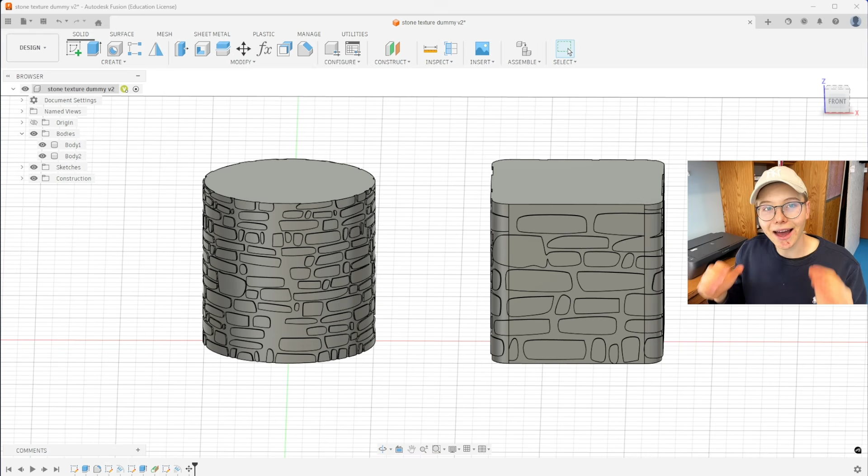After watching this video, you will know exactly how to texture your 3D prints with a stone wall texture. I'm going to show it for a flat surface and then even for a cylindrical one that is a bit more complex, but I believe you can make it. I have my printers running, so if there's any additional noise, I'm sorry, but I hope it won't make that much of a disturbance.

As you can see, I have already both of the designs ready in Fusion 360, so I'm going to be showing you how to do this quite quickly, and I'm going to be starting a completely new design so that you can go with me during the designing process.

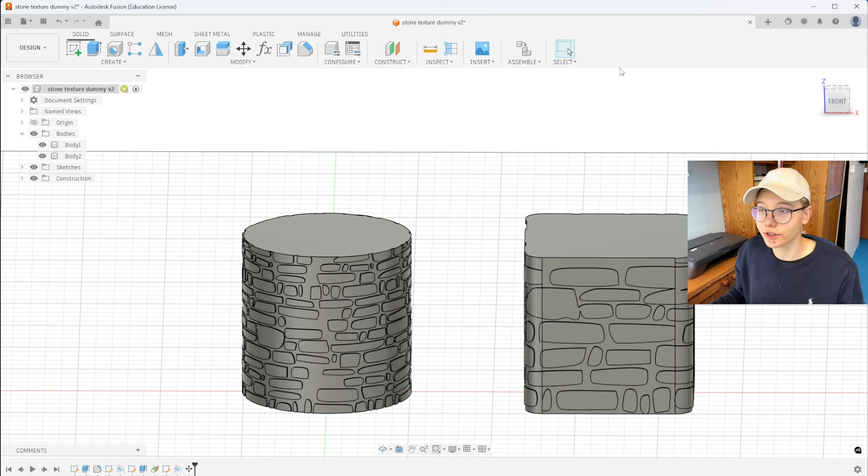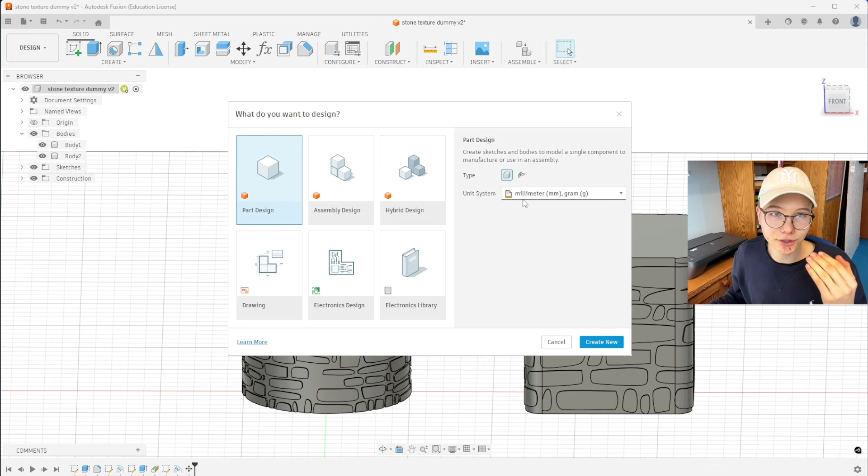So we're going to start a new design by clicking Ctrl N, or just clicking on this plus sign new design over here. Once we have that, we can select part design, because we're not going to be making any complicated assemblies. Once you click on part design, you can click on create new. I'm going to be doing it in millimeters. If you are from America, you can do it in inches. It doesn't really matter, just adjust for your own values. So click on create new.

Once you have that, first of all we should save it, of course. So we're gonna save the part so that we actually know where it's at. Once you have it saved, you can always be sure that the file doesn't just disappear.

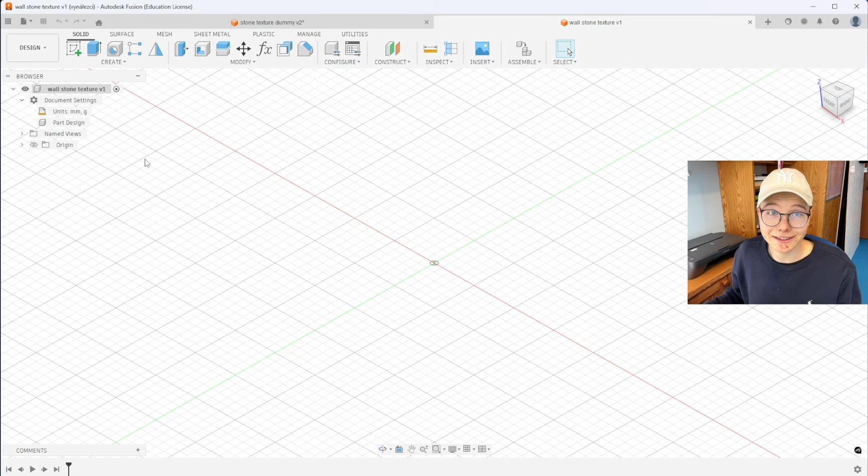Now we're gonna be starting with the flat texture. I'm gonna show you how to create it on just a very flat 2D thing so that you can apply it, for example, for your walls if you want to 3D print one with a texture.

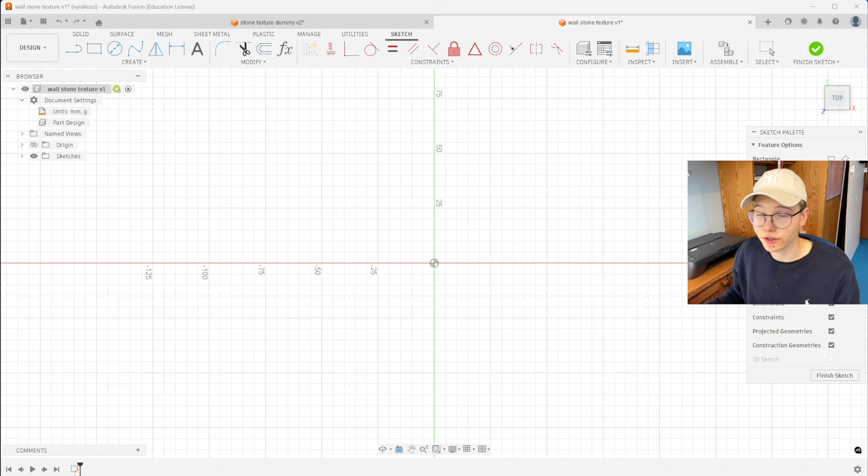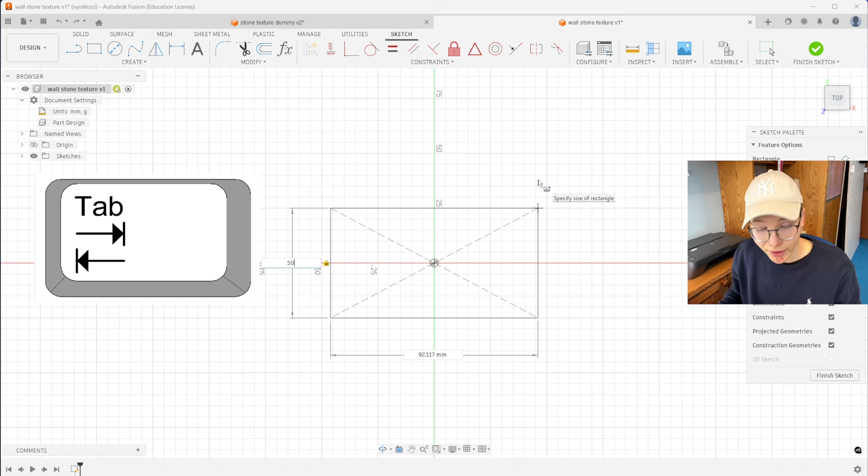So go into create sketch. In create sketch, select whatever plane you have. I'm going to create just a very simple square so that I can show you how to apply the texture. So I'm going to click on R to create a rectangle and select the center rectangle from the right menu. Once you click on the origin, you can stretch it out and input the values in there. A very good feature in Fusion 360 is that you can input the value. For example, I wanted 50 millimeters on one side, then click tab, and it will switch automatically to the second side, which can speed up your designing process quite amazingly. Once you have that, you just hit enter and it appears.

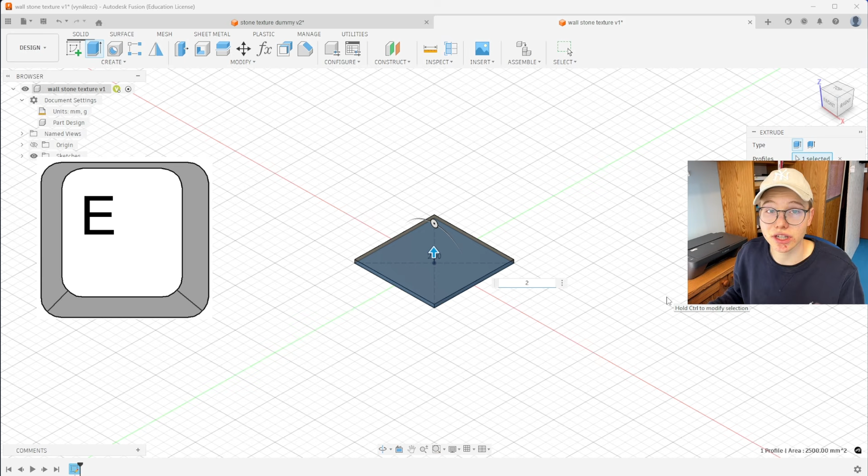That's all that I'm going to be needing from this sketch right over here. So I can go to finish sketch, extrude it by clicking on E and selecting, for example, 2 millimeters, just to show you how you can apply this texture on your own. Once I click OK, I have created this object that I'm going to be applying the texture to.

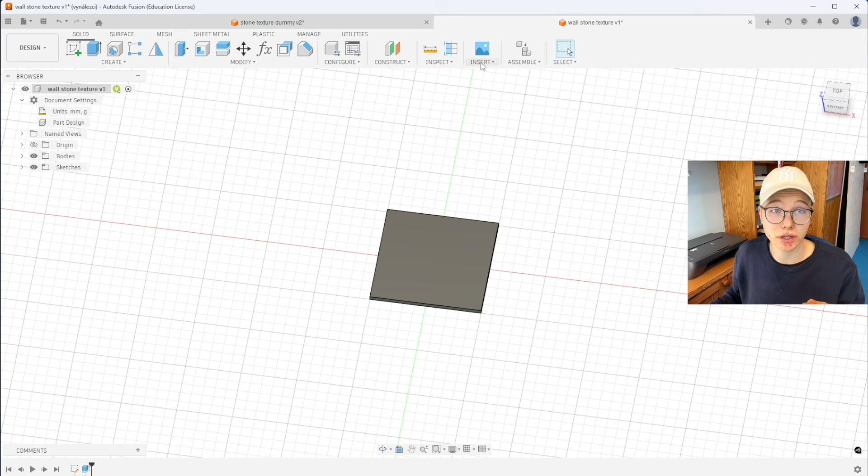The texture is in the format of an SVG, which is basically something you can take and use in Fusion to put something into 3D space. It's not just a basic image. It has special definition so that Fusion can actually convert it into a 3D object. So that's what an SVG is.

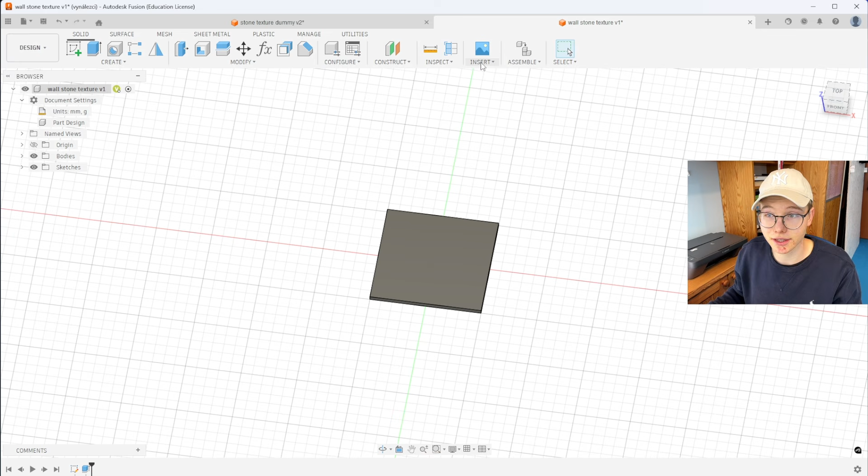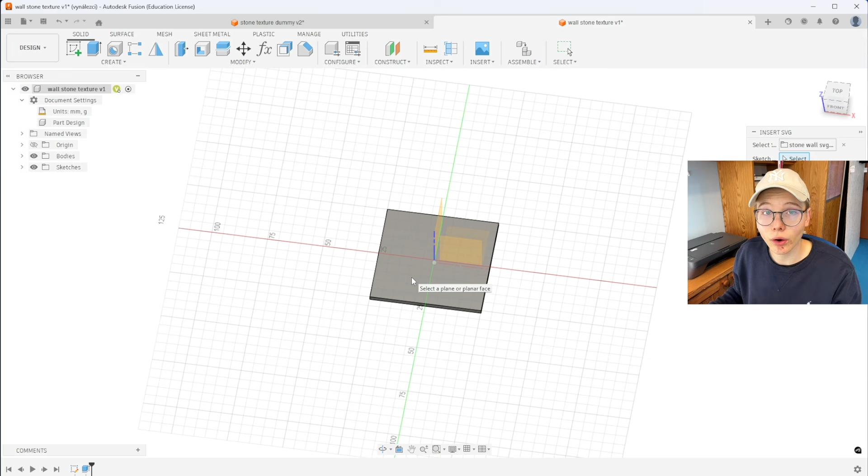Once you have the SVG downloaded, you're gonna go into Insert and insert an SVG, which is right over here. Once you click on that, it will allow you to insert something from your computer. It's gonna be named Stonewall SVG. Once you click that, it will ask you to select a plane or a face on which you want to place this texture. So I'm going to be selecting this face because that's the flat surface that I want to apply the texture to.

Once you select it, it will import this stone wall texture into the design. Now you can position this and size it however you want by adjusting these arrows that you have right over here. You can even place it on an angle. So if you want an angle, you're gonna move with this, but I do not want an angle, so I'm not gonna be applying it.

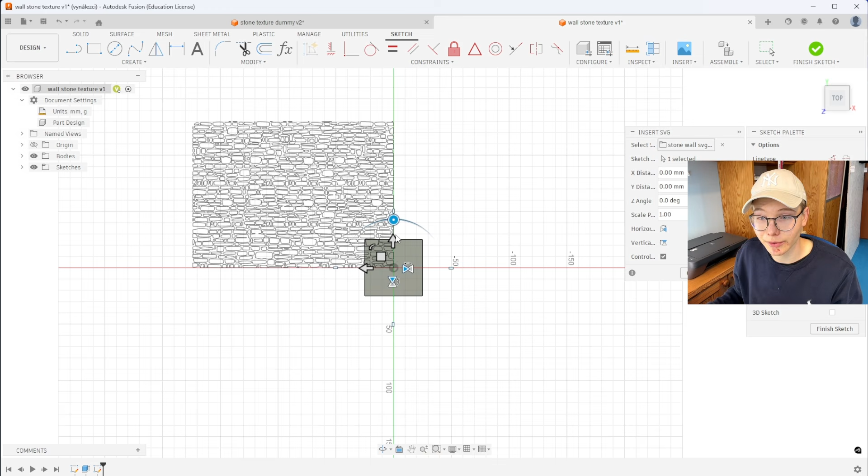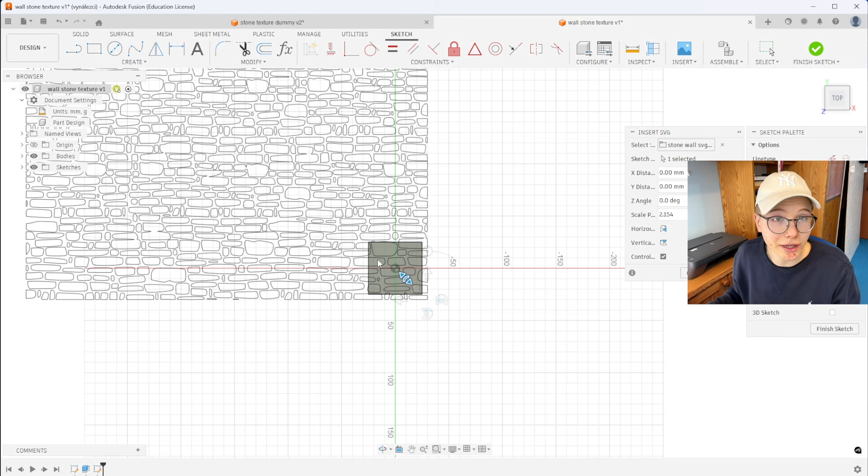If you want to move it and have it somewhere else, you're just gonna drag these arrows right over here. And if you want the stones a bit bigger because you want a different texture, you're gonna be dragging this small arc that is over here, and by stretching it out you make it bigger, and by pulling it toward yourself you make it smaller. But I would recommend, if you are making this for 3D printing, rather making it bigger so that the printer doesn't have that much trouble actually making the texture, rather than smaller.

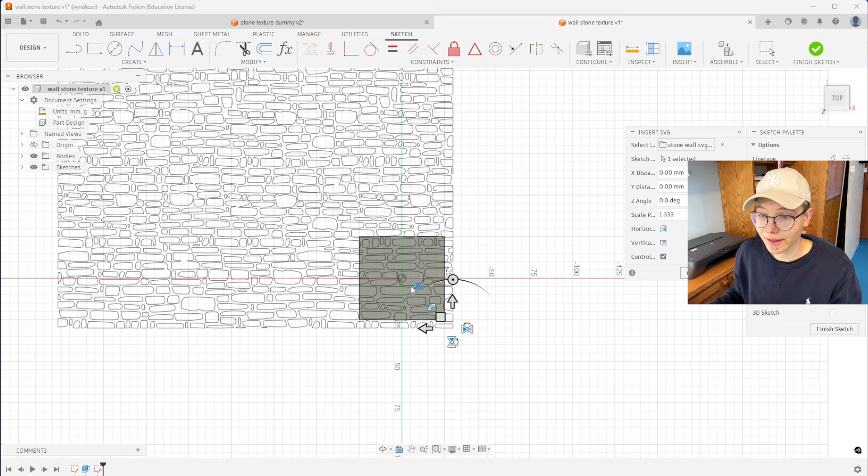So once you pick your size, for example, let's say I would like to have it just like this, you can click on OK. Now Fusion might take a bit of a while to load because the texture is a bit more complex shape for the software to accept, but it should be able to do it if you have a decent computer. I don't really have a good computer and it is still able to do it, so you should be able to do it definitely as well.

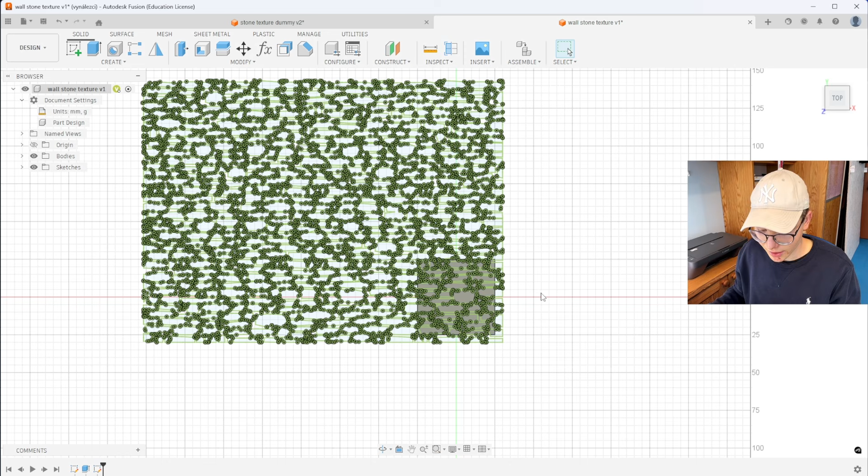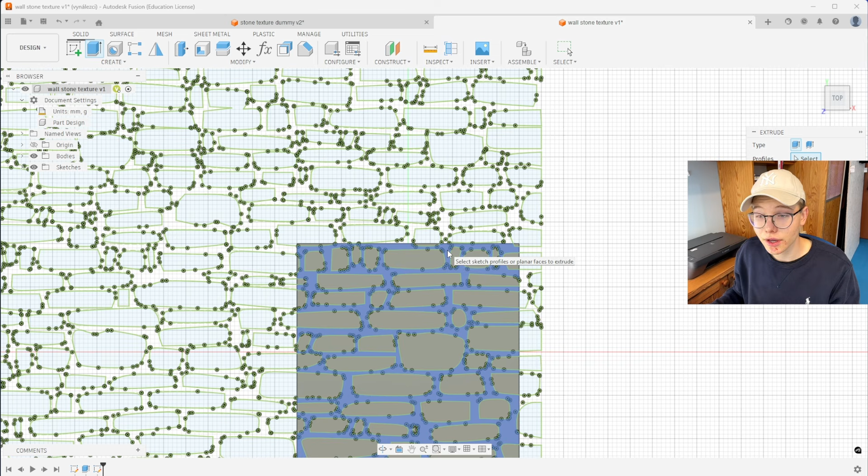Once you have that, that's all we need from this sketch. Finish the sketch, then click on E for extrude, and select either the stones you want, or the spaces between the stones. For easier use, and to avoid selecting all the stones individually, click on the spaces between the stones, and instead of pushing the stones up, push the spaces down, so we're using a negative value.

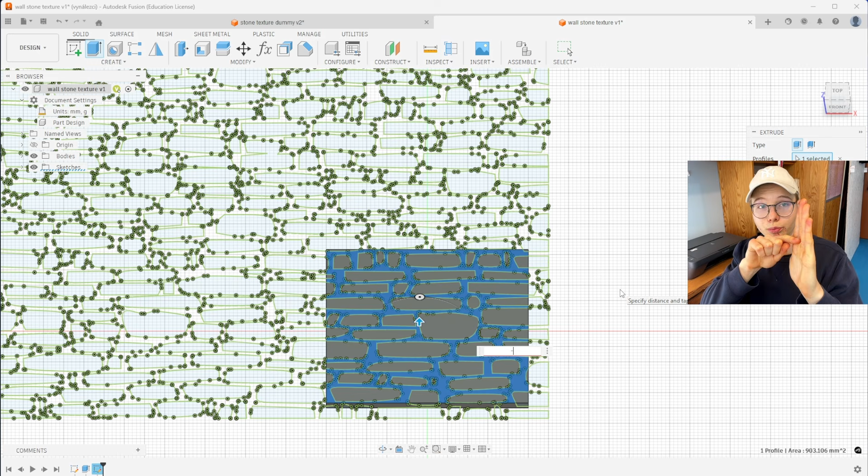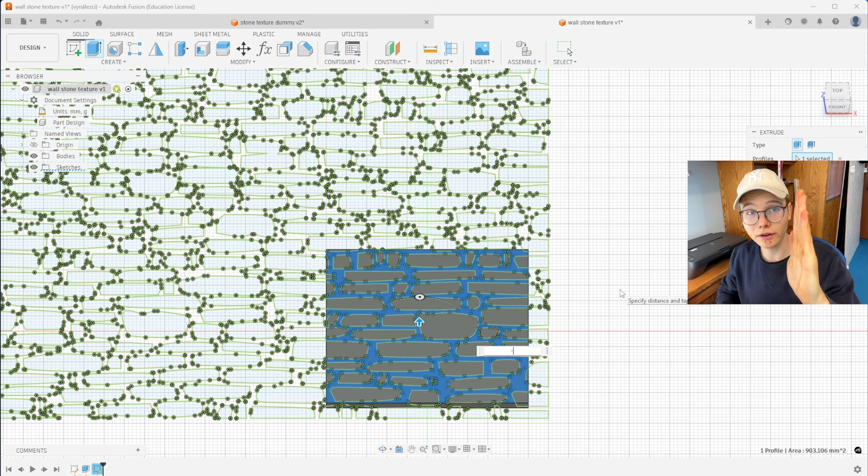Because we're going to be 3D printing this, if somebody wants it vertical and you put this value too high, it will create overhangs that aren't printable. I recommend not going over 0.4 to 0.8 millimeters, but you can adjust this on your own. If printing flat, it doesn't matter, you can use any size, but for vertical or angled printing, stick to 0.4 maximum.

I'm going to use 0.4 so I can show you. As you can see, the operation was automatically selected to cut, so it will cut into the stone. Once you hit OK, you now have this very simple but beautiful texture applied to your surface. That's how simple it is to put it onto a flat surface.

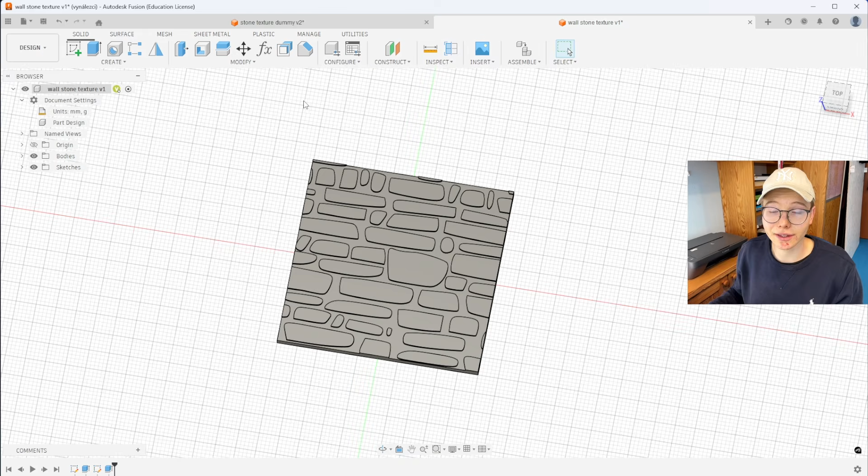Now I'm going to show you how to put it onto a cylinder, which is a bit more complicated, but many of you can make something like a tower from it, which even I use in my designs, and it looks really amazing, so I think you'd like to see this.

First, we're going to hide this body by going into bodies, selecting the arrow, and clicking on the eye so the body disappears. Now we're going to make the cylinder.

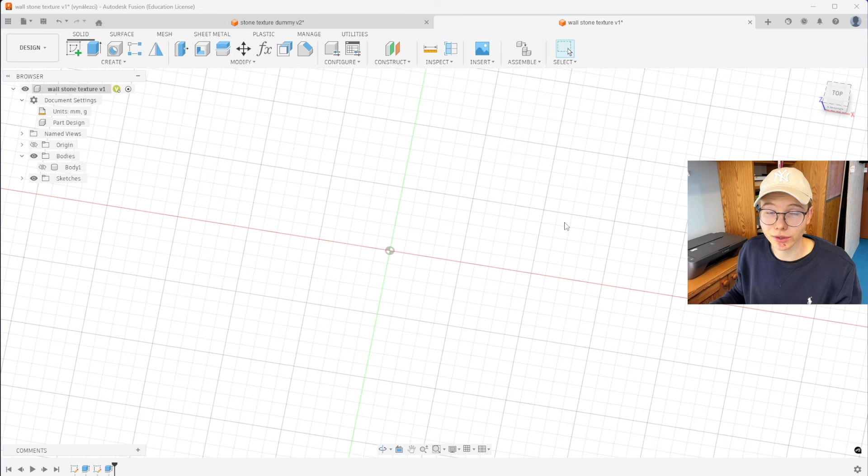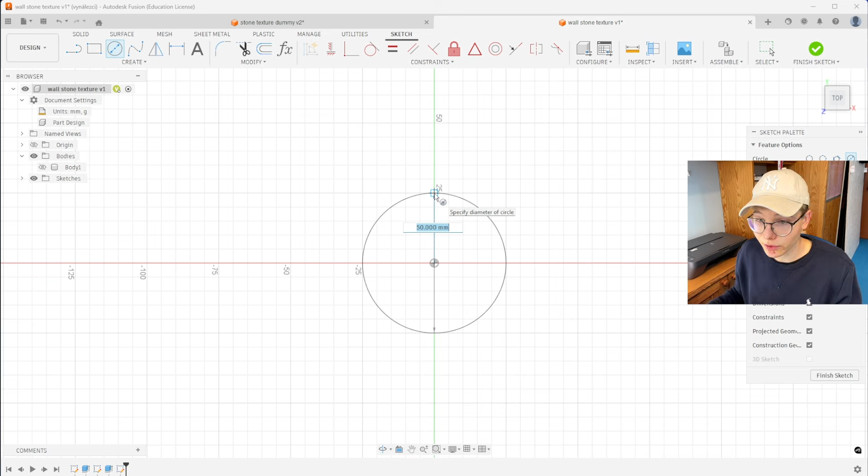To make a cylinder, create a new sketch on this plane. Create a circle by hitting C, or use the menu, but it's good to know shortcuts since it speeds up the design process a lot. Now pick the diameter. It's really important to remember this diameter because we'll use it later, since there's an additional complication that we don't have with a flat surface.

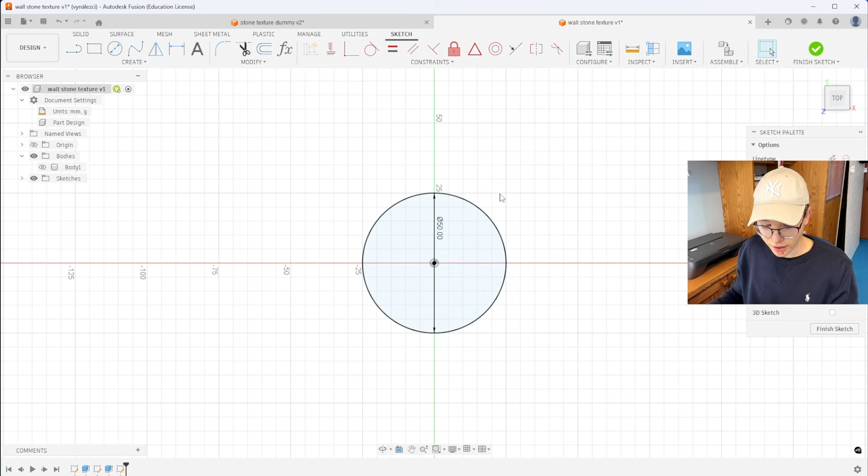I'm going to stick with, for example, 50 millimeters. If you use inches, it's going to be a bit different. Once you have that, that's everything we need to create the cylinder.

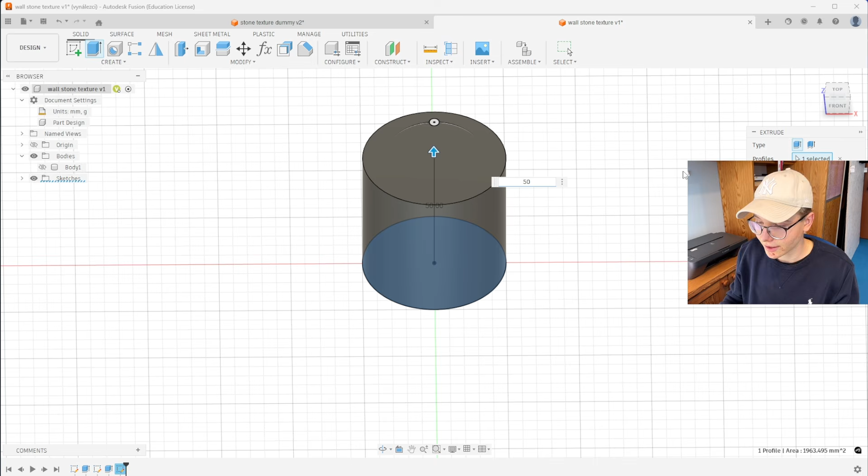Now you're going to extrude this again. Either hit extrude in the menu, or click E for the shortcut, and extrude it to whatever size you want. I'm going to stick with 50 millimeters, or whatever inch value you had. Once done, click OK or hit enter to speed up the process. Now you have this very simple cylinder.

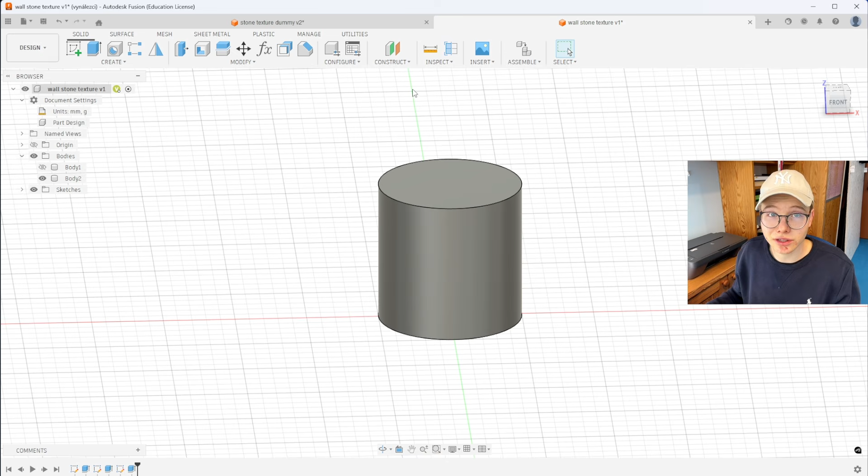Now we're going to import or insert the SVG texture again, but we need to do it a bit differently. First, we're going to construct a plane to make it on. To create the tangent plane we need, go into Construct, and select Tangent Plane. This will create a plane that is tangent to the cylinder in front of you in the design.

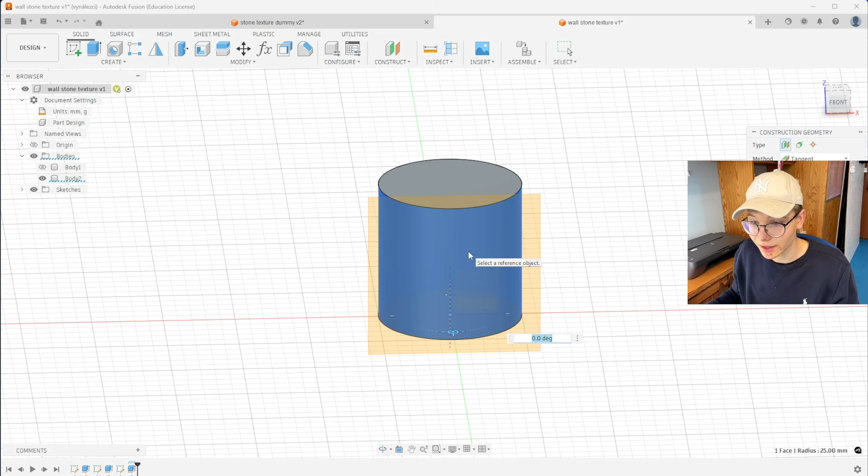You're going to create the tangent plane and select the face of the cylinder you want this to apply to. Once you hit it, it will pick the plane that is facing you, so Fusion really makes it simple. Once you have that, click OK.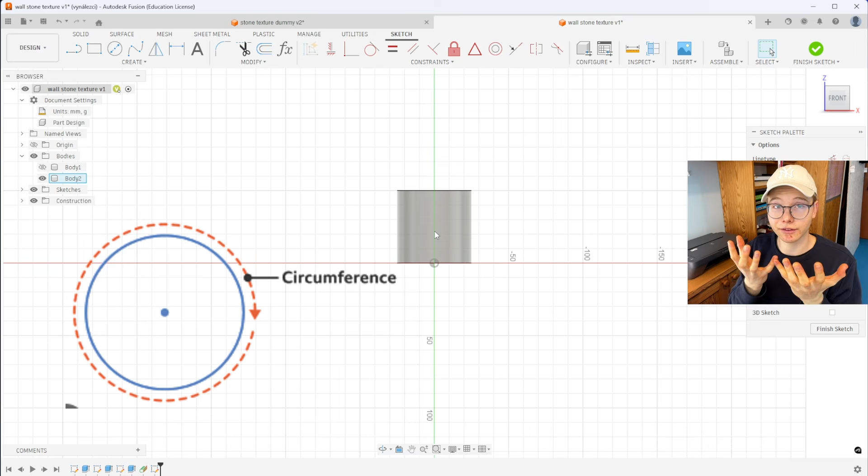Go into sketch and create a sketch on the plane we just created. Now we need to know the circumference of the cylinder so we can put the texture only on the circumference without it going beyond or intersecting. To do this, Fusion has an amazing feature we're going to use. Click on Line from the menu, or L for the shortcut, which again speeds up your process.

Click on line, select and go from the origin, and drag it out, making sure there's 0 degrees so that it's actually horizontal to the origin that we want.

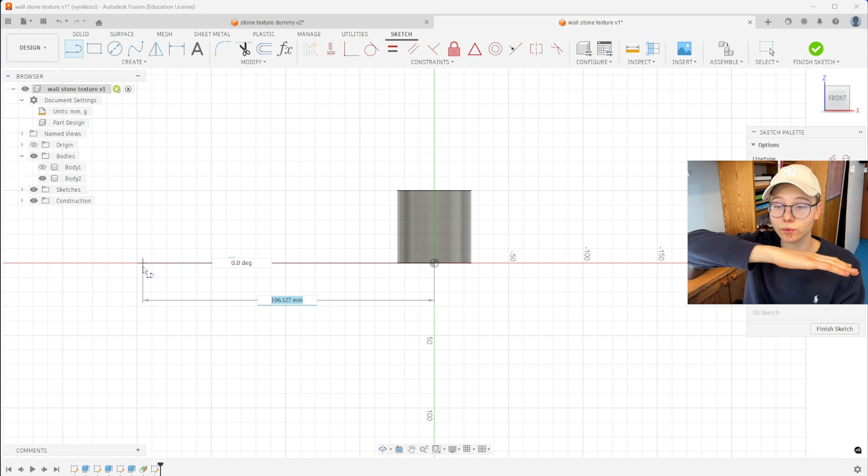Now you're going to import the diameter you chose, because the formula for calculating circumference is diameter times pi. Fusion allows us to use pi without having to estimate the value ourselves. So first import the diameter you have—I have 50 millimeters, though you can use whatever units, inches or centimeters. So I'm putting in 50.

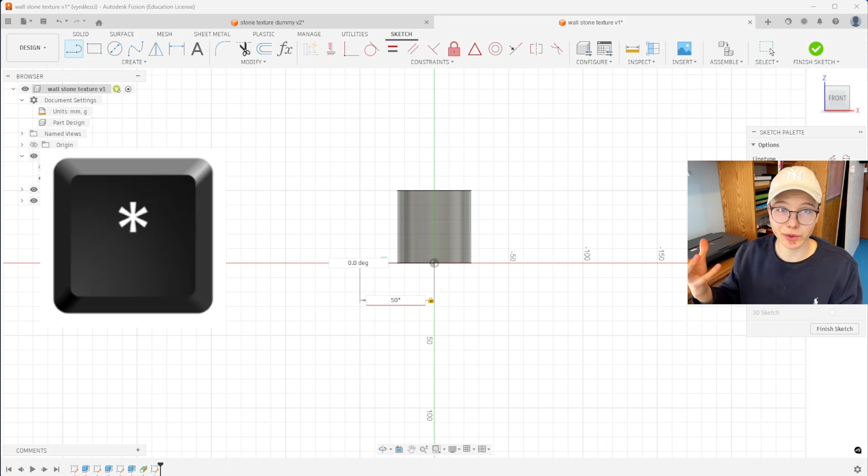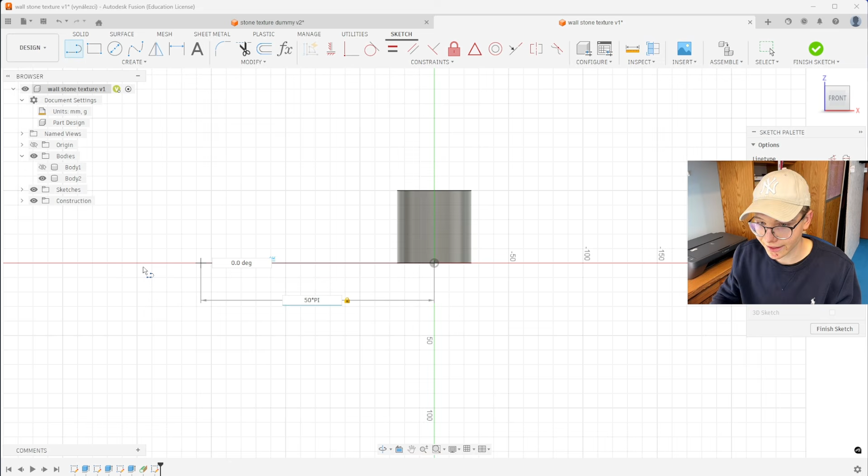Now to use pi, hit the multiply button—put the star that represents multiplying in Fusion—and then import pi. Fusion allows you to import pi by typing capital P-I, and this creates pi for you in the formula for the length of the line. Once you have that, just hit enter and it calculates. As you can see, I inputted 50 millimeters and it's about 157, which is basically 50 times 3 point something—so you can see pi was estimated correctly.

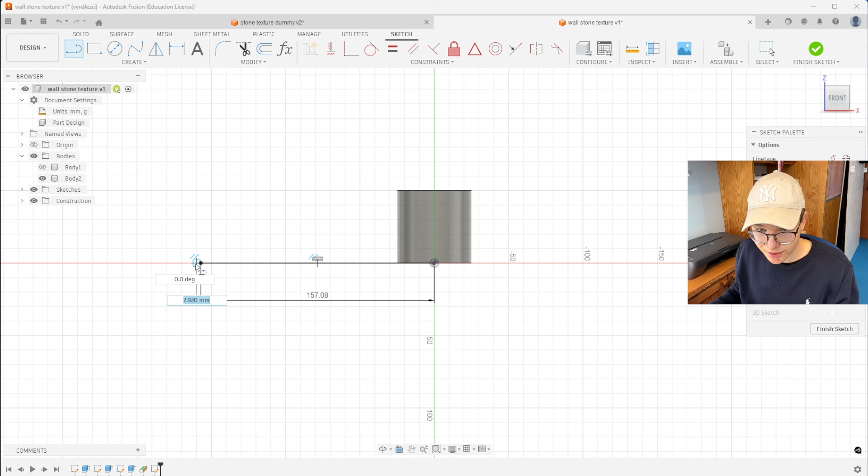Now we're creating another line going from this point at the end of the line upward, because this creates the limiting line where we can actually place the SVG. Once you have that, hit insert again and insert the SVG that we already inserted before on the flat surface.

Now the really important part is using the scale arrow to scale the sketch so that it doesn't go over the line, but goes just very close to it.

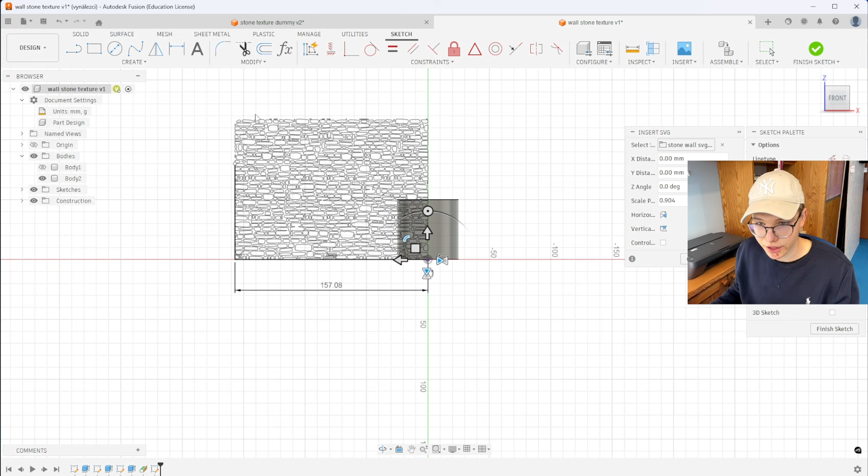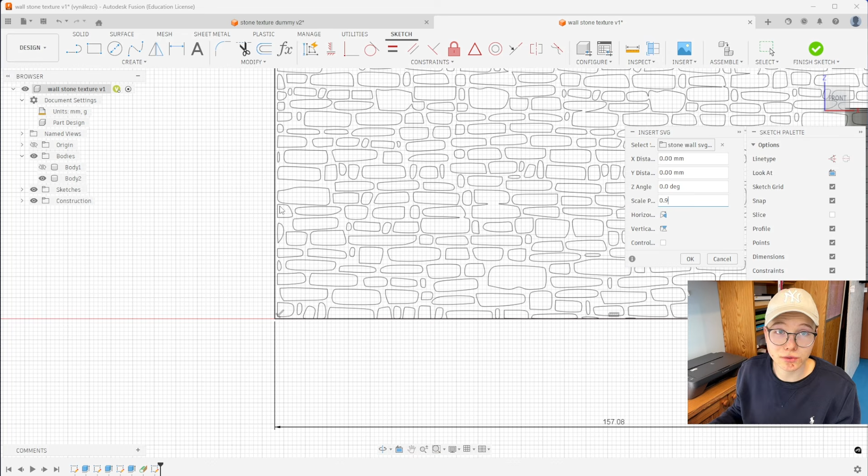What you're going to do is create an estimate and then look at the value in the scale window, which I need to show you right over here. As you can see, there's a scale constant that you need to adjust, and once you adjust it so the stones don't go over the line, that's the value you want. For me it was 0.9, but you'll be scaling to your own setup—just make sure the stones aren't reaching over this line and you'll be completely fine.

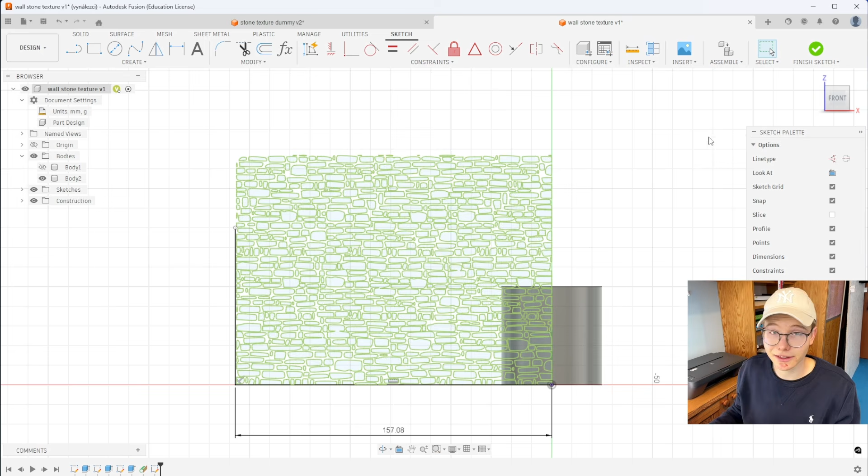Once you have that, click OK, and the texture is created exactly as we need it. Now you can finish the sketch, but we're not going to use extrude, because extrude wouldn't actually bend the stones as we need them.

So we're going into Create, and in Create you select Emboss. With emboss, what it basically does is shape the stones to the face you select—so with a cylinder it will actually make them round.

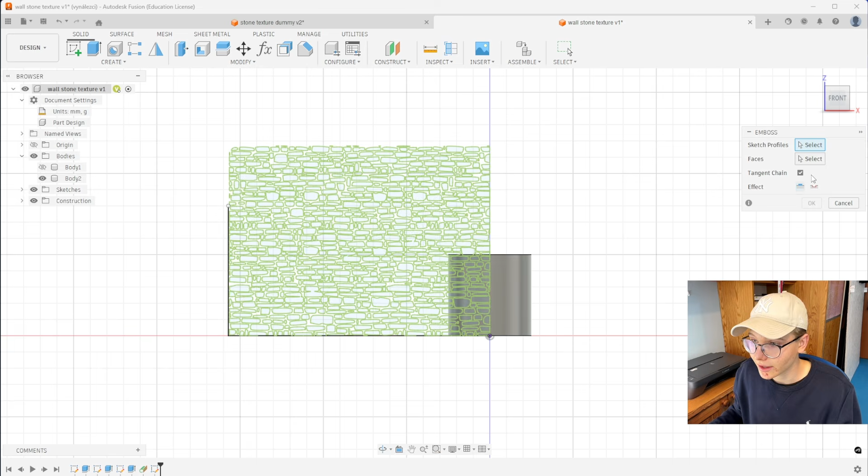Select sketch profiles, so you can drag over all of the stones that you have. Try to select the least amount of stones so Fusion doesn't have to compute that much. As you can see, it selected them beautifully, and now you can just select this cylinder and hopefully it works. As you can see, it applies the texture amazingly and doesn't write any error messages at all.

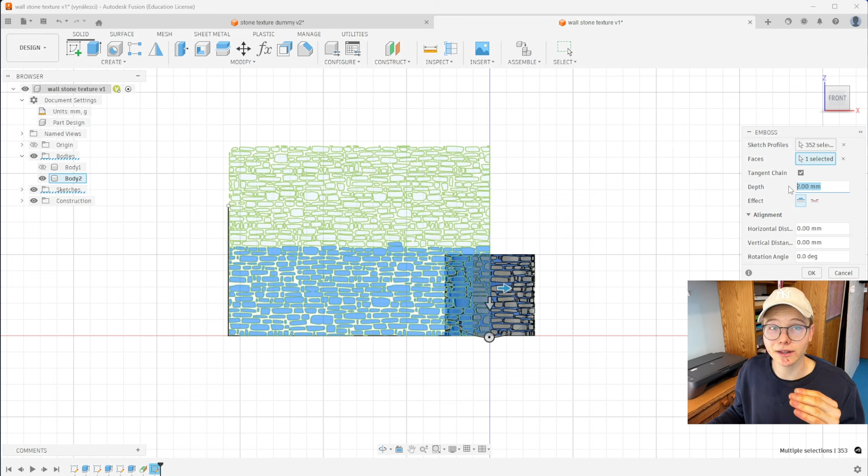Now again, as I said before, you're going to need to adjust the depth with this one definitely, because if you stayed with the 2 millimeters that were there previously, it wouldn't actually be able to print at all—2 millimeters of overhang is too much for a 3D printer.

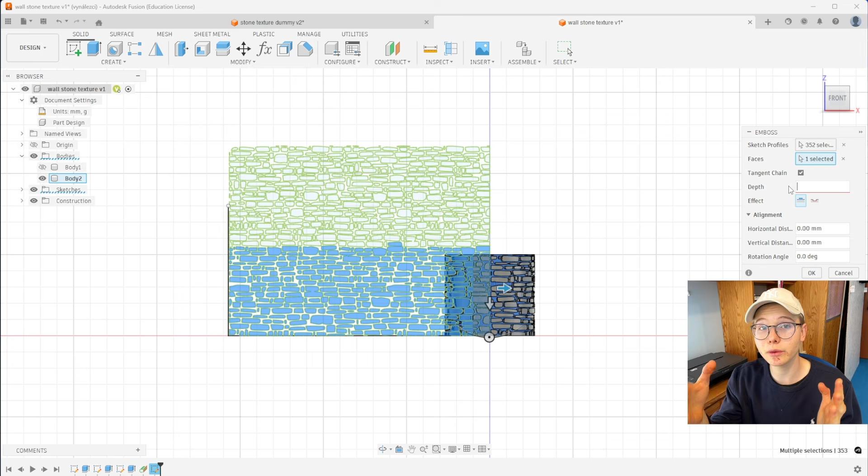So what we're going to do is adjust this to 0.4 millimeters, as I said before, because the 3D printer can handle this value quite well. You can even go a bit more, but don't go over 0.8 millimeters for sure.

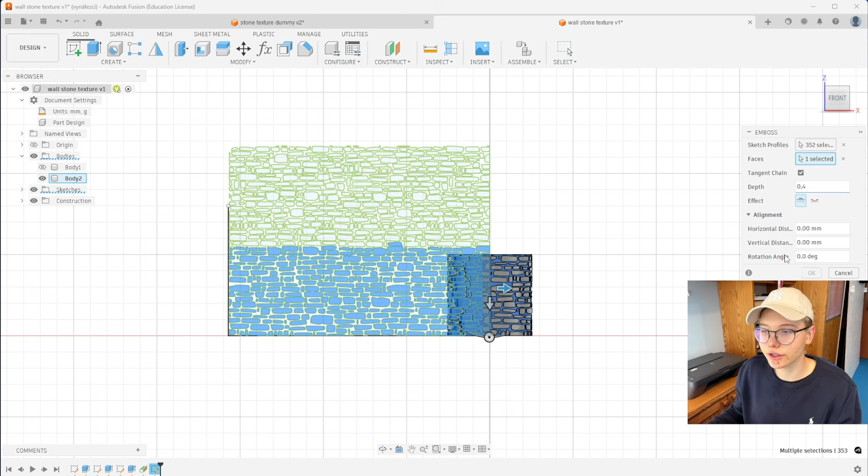Because we're putting these stones up, you can keep the effect of embossing—we're not cutting anything out. So we'll input 0.4 millimeters. It's going to adjust the stones so they're a bit smaller, and now you can just hit OK, and you'll have the texture applied to your cylinder.

Now if your Fusion successfully loaded the SVG and applied the texture with the embossing feature, you're going to have this beautiful looking little tower that you can then apply your own design to and use with your 3D printing.